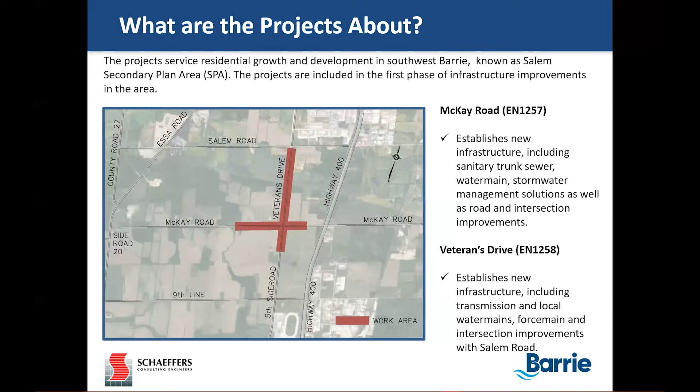As earlier mentioned, this project is to support the residential growth within the Salem Secondary Plan Area. The Salem Secondary Plan Area was established in December 2016 and incorporated into the city's official plan as Official Plan Amendment 38. The secondary plan has identified land use such as residential and mixed use within the area, and has addressed gradual development to be implemented in 3 phases.

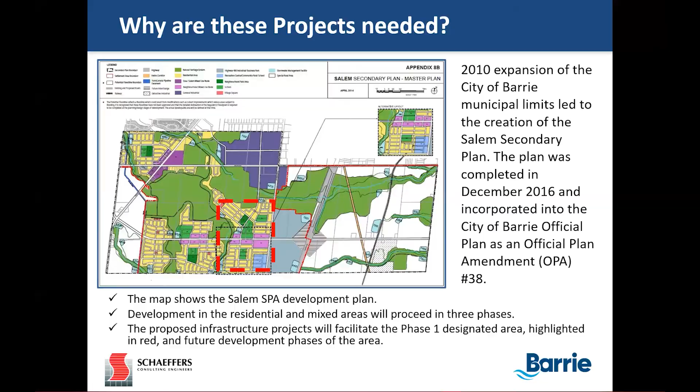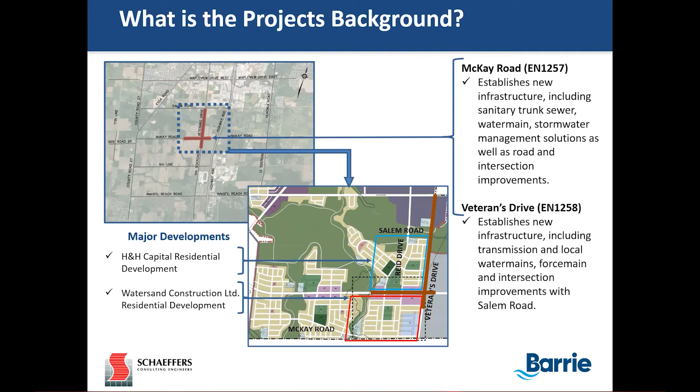The proposed infrastructure projects will facilitate part of the phase 1 area, located at the southwest part of the overall plan. The McKay Road projects include sanitary trunk sewers, water main, stormwater management solutions, as well as road and intersection improvements. Veteran Drive projects include transmission and local water mains, forcemain, and intersection improvement at Salem Road. This is to support 2 major projects, including the H&H Capital residential subdivisions and the Watersand Construction Limited residential subdivisions.

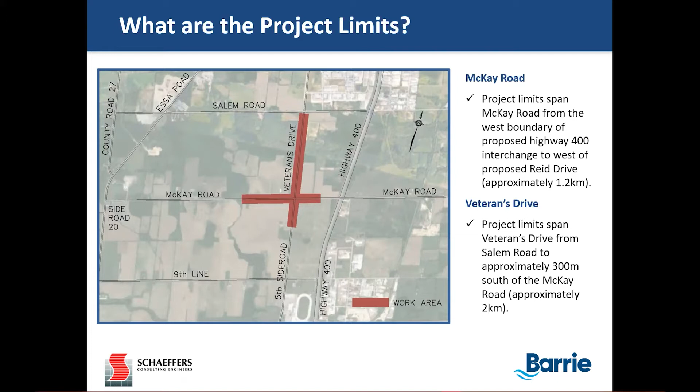For the McKay Road projects, the project limit spans McKay Road from the west boundary of the proposed Highway 400 interchange to west of proposed Reid Drive, approximately 1.2 kilometers. For the Veteran Drive projects, the project limit spans Veteran Drive from Salem Road to approximately 300 meters south of McKay Road, approximately 2 kilometers.

All construction projects require a mixture of services, including planning, design, and construction. The project team consists of an owner, City of Barrie, a designer, Schaeffers Consulting Engineers, and a builder, Salem's Landowners Group, care of DG Group. The project delivery method is design, bid, build.

The detailed design steps are feasibility, 60%, 90%, and 100%. Tender steps are tender documents, bid analysis, and contract award. Lastly, active construction. Currently, step 1 is completed, step 2 is ongoing, and step 3 is to start soon.

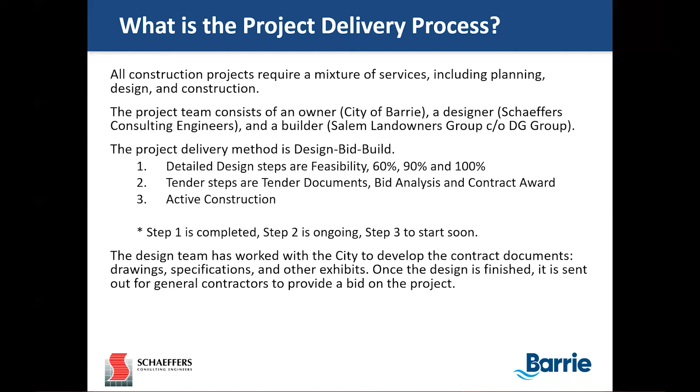The design team has worked with the city to develop the contract documents, including drawings, specifications, and other exhibits. Once the design is finished, it is sent out for general contractors to provide a bid on the projects.

For the McKay Road West sanitary trunk sewer installation, this includes installation of a deep 1,200 diameter sanitary sewer along McKay Road, from 800 meters west to 350 meters east of the intersection with Veterans Drive, using the trenchless construction method. 5 tunnel access shafts are required, up to 10 meters wide and 20 meters deep. Shafts will temporarily occupy a major part of the road allowance.

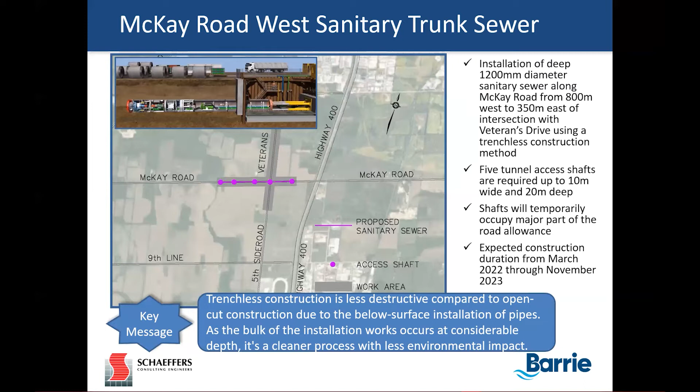Expect construction duration from March 2022 through November 2023. Trenchless construction is less destructive compared to open cut construction due to the below-surface installation of pipes. As the bulk of the installation work occurs at considerable depth, it's a cleaner process with less environmental impact.

Since the downstream trunk sewers east of the intersection with Veterans Drive are not available, a solution to the problem is to construct a temporary sanitary pump station at the intersection. Under interim conditions, sewage flow from the proposed 1,200 millimeter diameter trunk sewer section on McKay Road west of Veterans Drive will be diverted to the pump station.

Using the temporary forcemain running along the east limit of Veterans Drive, sewage will be pumped to the existing sanitary sewers on Veterans Drive north of Salem Road. The temporary works are not part of municipal projects; they have been designed and will be constructed by the Salem Landowners Group.

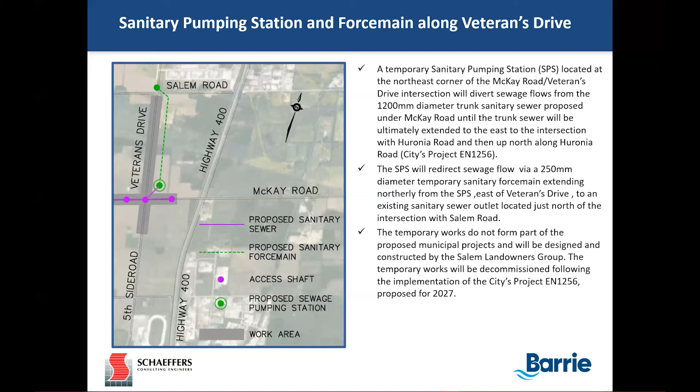This works will be decommissioned once the downstream sanitary trunk sewers east of the project area is completed, supposedly by 2027. For the McKay Road West Watermain works, this includes installation of 400 millimeter diameter watermains along McKay Road from 800 meters west to 180 meters east of the intersection with Veterans Drive.

The watermain is located within the widened parts of McKay Road in the south boulevard, and will ultimately be connected to the trunk watermains along McKay Road East. It will be done by open cut construction, with expected construction duration from April 2022 through October 2022. The watermain allows connections to the existing Barrie water supply network and provides drinking water to the Salem development area.

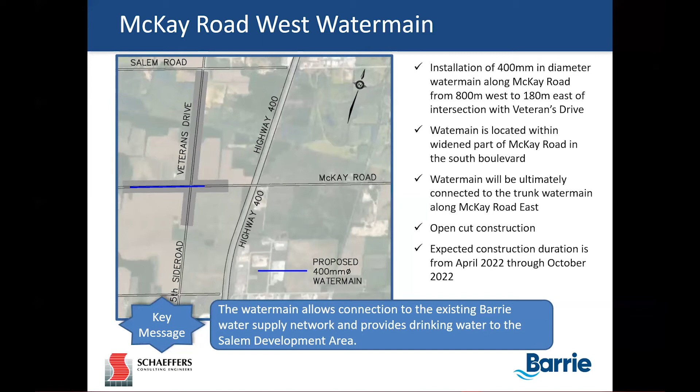McKay Road West and Veterans Drive intersection improvements will include raising the intersection about 2 meters to provide drainage improvements and sufficient cover for proposed storm sewers. McKay Road and Veterans Drive roadway widenings will accommodate future traffic in the area and proposed interchange connections to Highway 400.

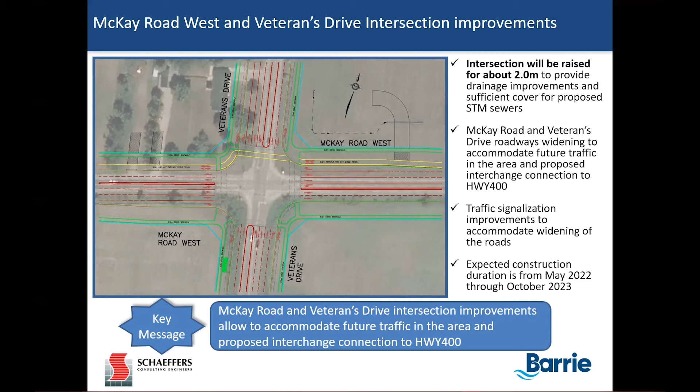Traffic signalization improvements will accommodate widening of the roads. Expected construction duration is from May 2022 through October 2023. The McKay Road and Veterans Drive intersection improvements allow for accommodating future traffic in the area and proposed interchange connection to Highway 400. For the Veterans Drive watermain works,

This includes installation of 400 millimeter diameter watermains along Veterans Drive from Salem Road to 260 meters south of McKay Road on the west side of the road. Also included is installation of a 500 millimeter diameter transmission watermain along Veterans Drive from Salem Road to McKay Road on the east side of the road.

The watermains are located within existing and widened parts of Veterans Drive. It will be done by open cut construction, with expected duration from April 2022 through October 2022. The watermains allow connections to the existing and future Barrie water supply network, provide drinking water to the Salem development area, and address looping and redundancy requirements of the network.

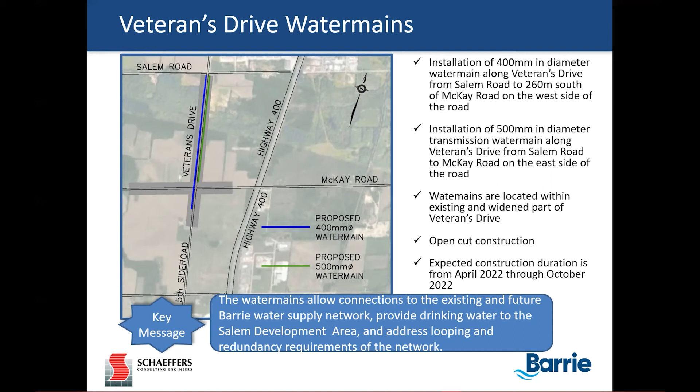Road closure and traffic detours will be required for these two projects. Traffic movements will be restricted to local access only in the work area. Alternative routes will be established, and passage of emergency vehicles will be maintained at all times. Road closure is required from the first quarter of 2022 to the fourth quarter of 2023. The important thing is to ensure safety of residents.

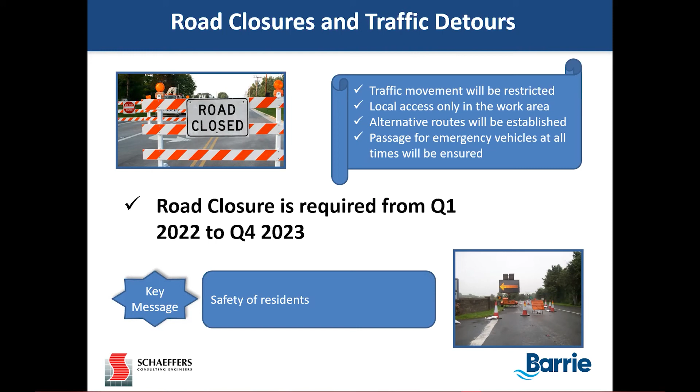Road closures and traffic detours will include closing of McKay Road from 1 kilometer west of Veterans Drive to east of Highway 400, and closure of Veterans Drive from Salem Road to 9th Line. Closure is required from the first quarter of 2022 to the fourth quarter of 2023, approximately 22 months. Local access for emergency services and residents will be maintained and coordinated with the construction contractors for about 3 dwellings.

Advance notifications and detour signs will be in place well in advance of construction. Works will take place primarily during daytime hours. Garbage collection will be provided at designated locations for pickup by the municipal contractors. Both roads will be closed so all construction components can happen simultaneously.

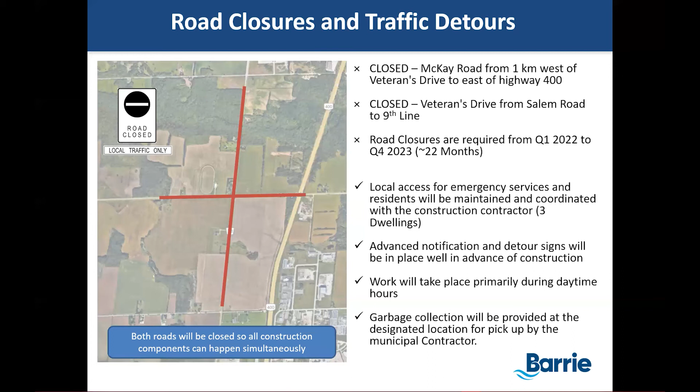Detour roads were developed through engagement with stakeholders and coordination with impacted services. The following stakeholders were consulted and their concerns have been addressed in the construction contracts: Barrie Fire, Simcoe County Paramedic Service, County of Simcoe, Town of Innisfil, and Simcoe County District School Board.

We also coordinated with other projects, including MTO's Innisfil Beach Road Interchange construction from 2022 to 2025, which includes closure of Innisfil Beach Road for 8 weeks from May 2023 to July 2023. No other city, county, or Town of Innisfil projects were identified. Coordination is constant.

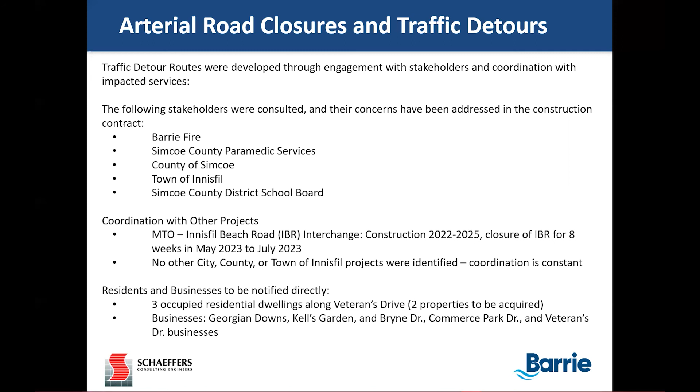Residents and businesses will be notified directly, including those occupying residential dwellings along Veterans Drive whose property is to be acquired. Businesses including Georgian Downs, Kell's Garden, Bryne Drive, Commerce Park Drive, and Veterans Drive businesses will also be notified.

With respect to the project schedule, the project started in 2021 with preparation of the detailed designs of the infrastructure. Time-wise, we are now at the tendering stage. Project tendering is scheduled for completion in February 2022. Construction is expected to start in March 2022 and be completed by November 2023.

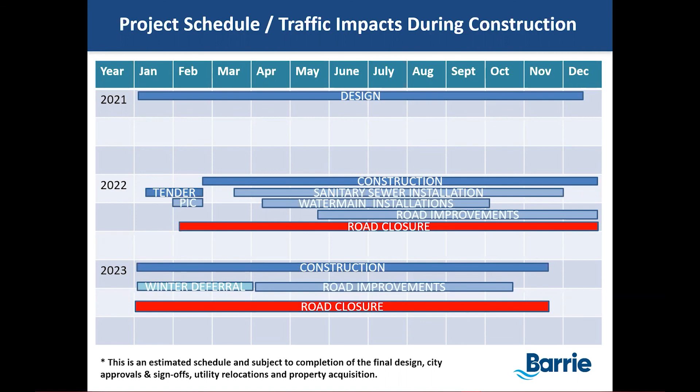For a detailed breakdown of the construction work schedule, we expect construction will start with setup in February 2022, followed by sanitary sewer installation in March 2022. The watermain work will start in April, and road improvements by May. Construction is expected to complete by November 2023.